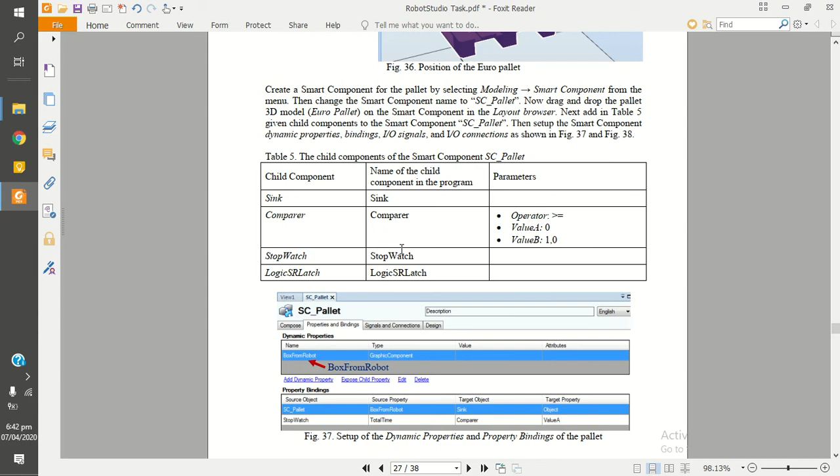Hello once again. In today's video, we will be doing assembly of the production line in RobotStudio. Previously, we did Euro pallet, conveyor, and gripper, so you will need all of them.

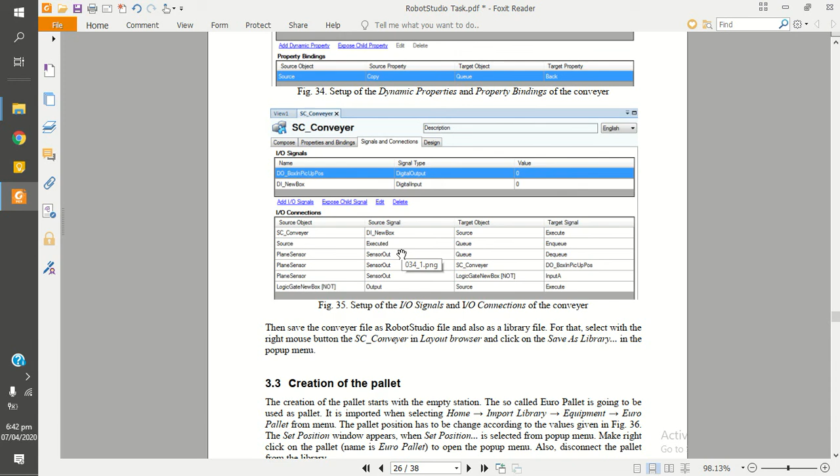You should already have 6 files: two files, a library file and a source file, for conveyor; one library and one source file for gripper; and the same for pallet. So at this moment you should have 6 files in the folder where you are saving your stuff for this task.

So for assembling, initially you will not just click file and new empty station. This is not the case for this assembling part. Instead you will be doing file, new, and solution with station and robot controller.

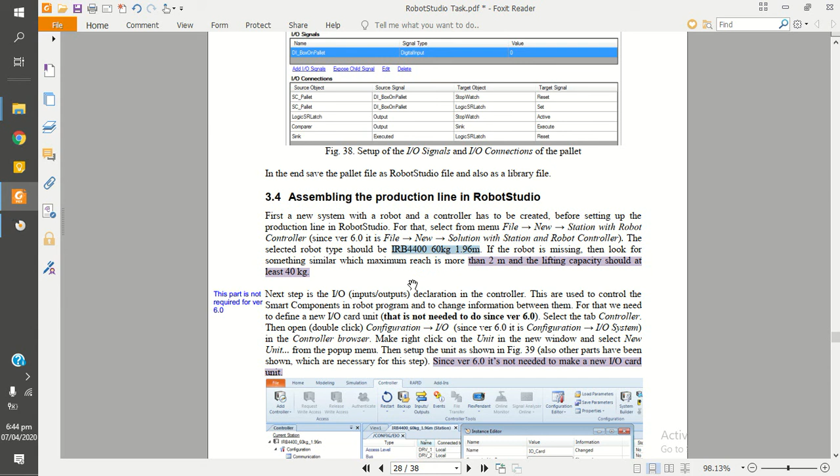So here it is, and you will find the required robot is the IRB 4400, for 60 kg, 1.96 meters... here it is, IRB 4400 for 1.96 meters. So you are supposed to select this and then create.

So in this PDF, it says you are supposed to make a unit IO card. Sorry, so if somebody is using version 6, he is not supposed to make this IO card, not supposed to make this stuff. So this is not required for those using version 6 and so on.

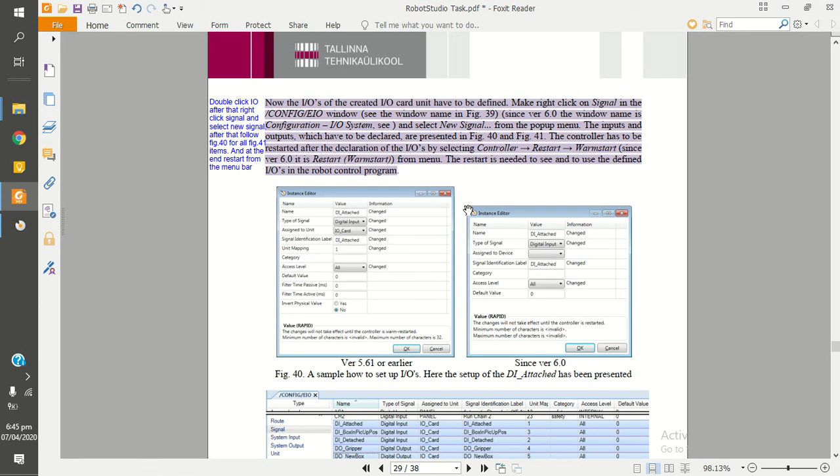So we will be skipping this paragraph and this figure. The next instruction is to set these editors and all the things which are required further. And here is your robot.

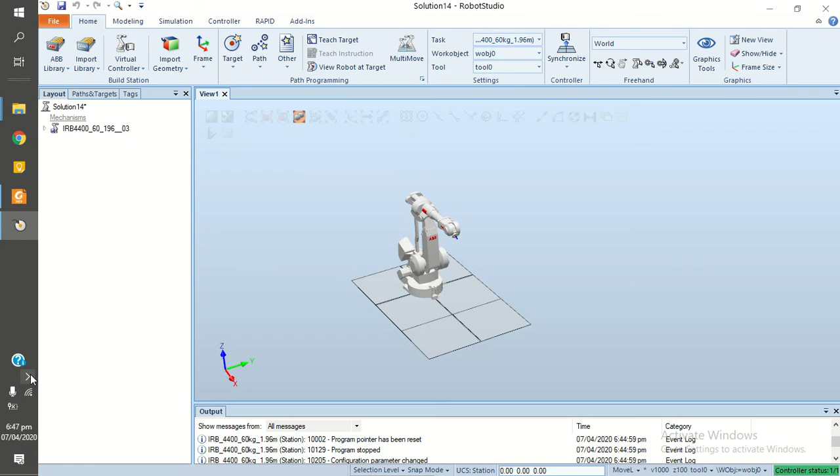The next step is to set these signals for the assembly. For that you are supposed to go to controller, IO systems, as I am using version 6, and right click on signal and new signal, then follow these two figures, 40 and 41.

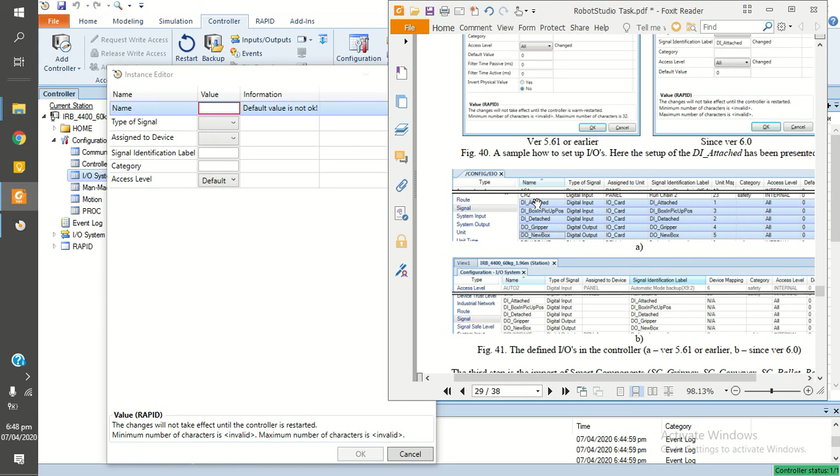For instance, I will do the first one for you. In the column of name I have di_attached, so I write di_attached, and in the column of type of signal I will write digital input, as I have been told in the PDF regarding the IO card.

As I'm using version 6, I'll be following option B, so it's empty, and di_attached again. So in the column of di_attached, all values are set to 0.

But be careful in typing the spellings of attached, detached, di, do, and everything. These spellings and commands you will be using in the program at the end of the task.

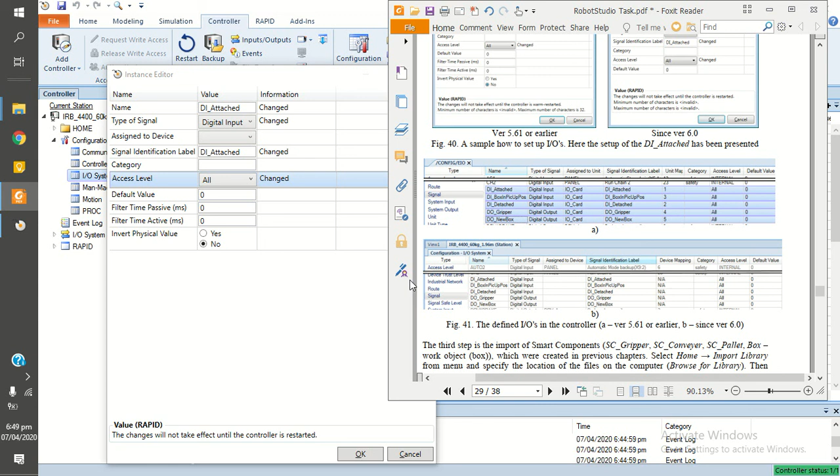So after doing all of them -- for instance I have done just one -- I got this in black color. All others are in gray, but the one I inserted is in black color. You will notice the changed color.

After doing all of that, you are supposed to restart, specifically a warm restart. Wait for a while until the part in the bottom right corner turns green. Now it's green, so it's all done.

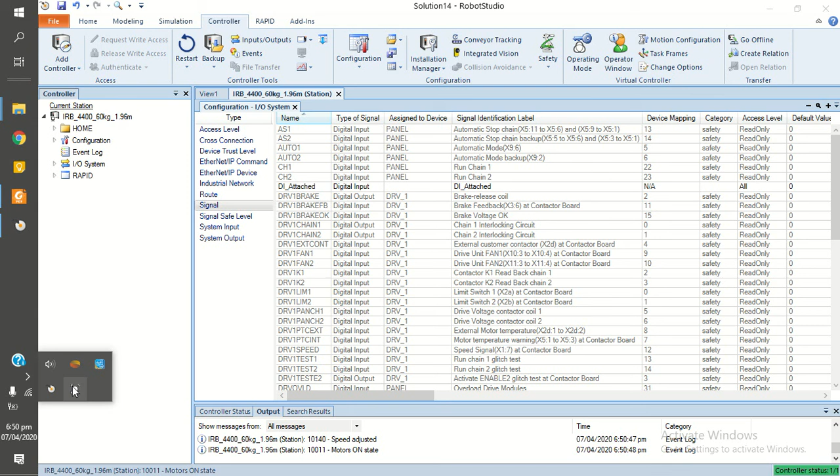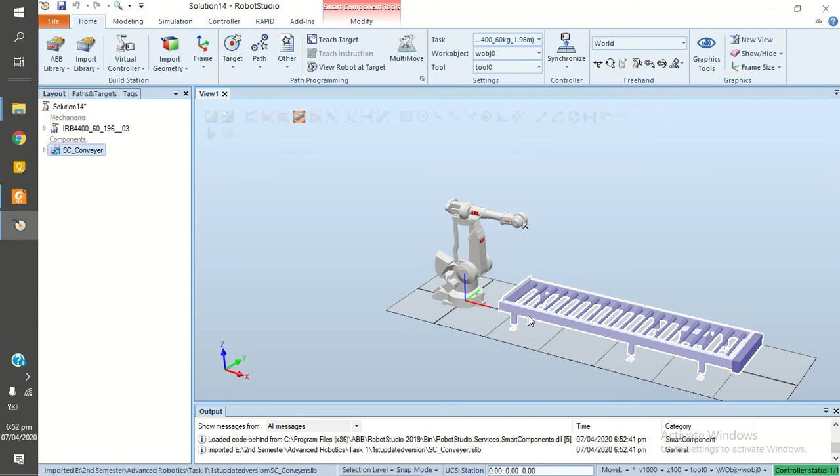Now it's time to import all the files. Go to home and import, then browse in the library -- at the moment I'm inserting my own files here. So this is library, this is conveyor. This is how you should import all the files from the folder you have saved them in.

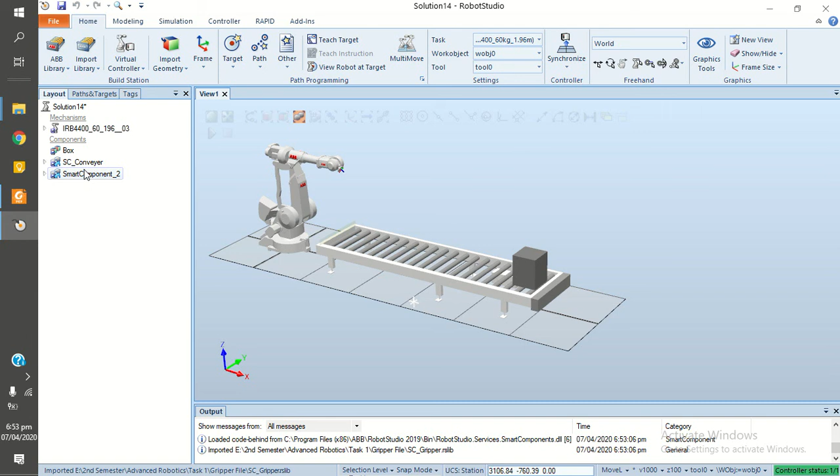You will see that the gripper is not in the right position it should be. Before doing anything, you are supposed to disconnect each and every smart component from the library. I'm doing this because I have to make some changes in it, so I'm importing the library file and then disconnecting it afterwards since I need to make changes.

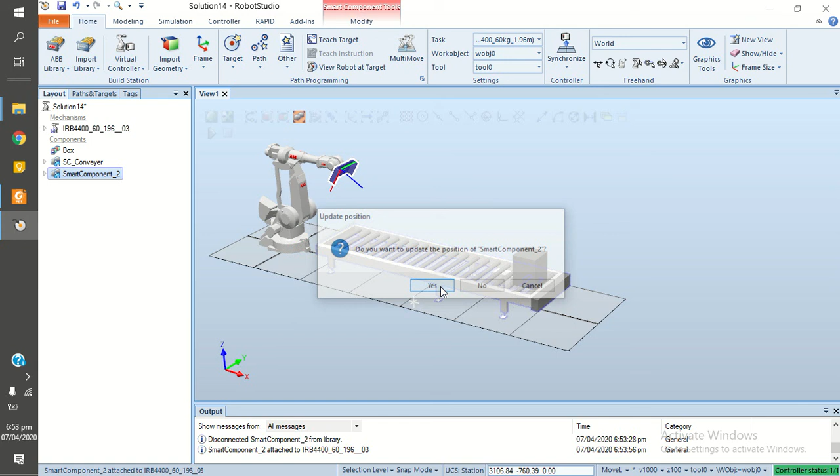So if it's not in the right position, the gripper, you are supposed to drag and drop your gripper to the robot, and here it is -- here is your gripper now in the right place.

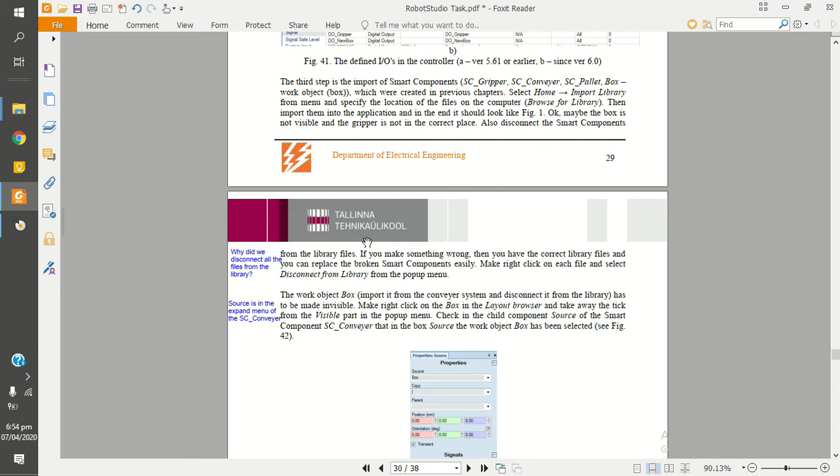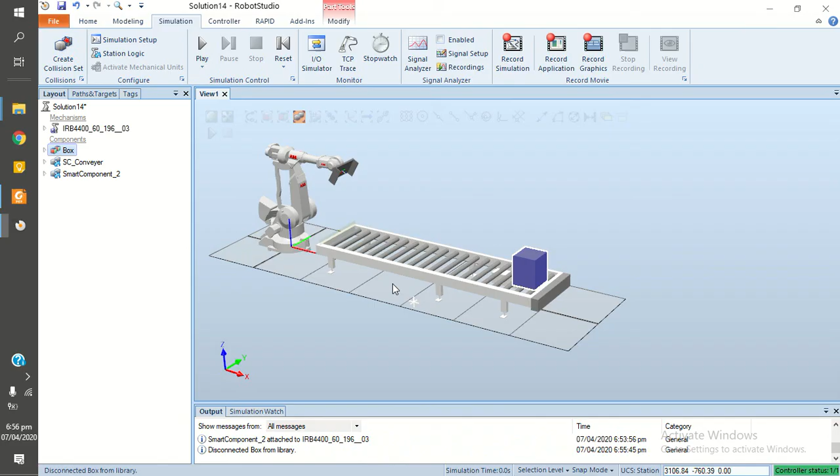Now is the time to set the binding and IO connections for your assembly. For that you are supposed to go to simulation and station logic from the main menu and set the binding IO connections as shown in figures 43 and 44: simulation, station logic, and IO binding, properties and binding.

In here you are supposed to set them like: in front of source object, select SC gripper, source property, target object -- as we did in previous components. The same applies for the signals and connections, following figure 44.

When you're done with all of the IO connections and IO signals, you are supposed to save all of the things in the assembly. For that, it is suggested to keep the name 'simulation start'.

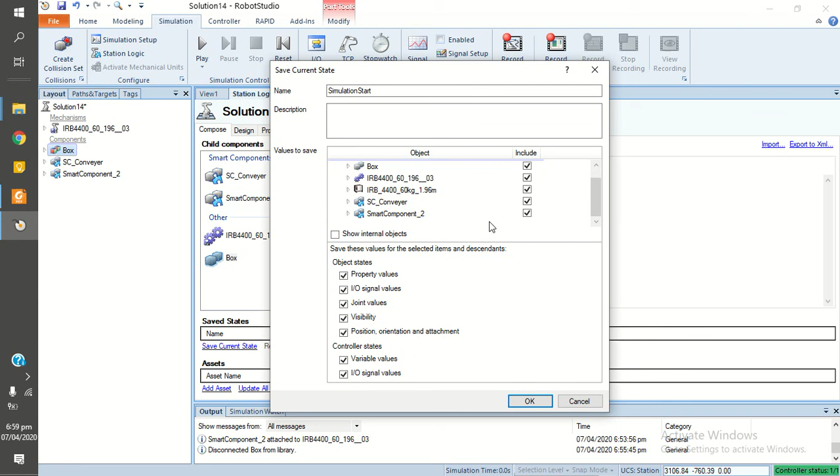Tick all the objects, and okay -- so we get 'simulation start' as we are told in the PDF in figure 45. After that we are supposed to click OK and close.

The last step, after saving simulation start in the saved state, is to go to simulation setup, and in the initial state option select simulation start, as we are told here, and now it's time to close.

So now we will be using this simulation start program, and we will be using it further. This was it for the assembly part in RobotStudio, and the next step is creating a program code. So that's it. Good luck.